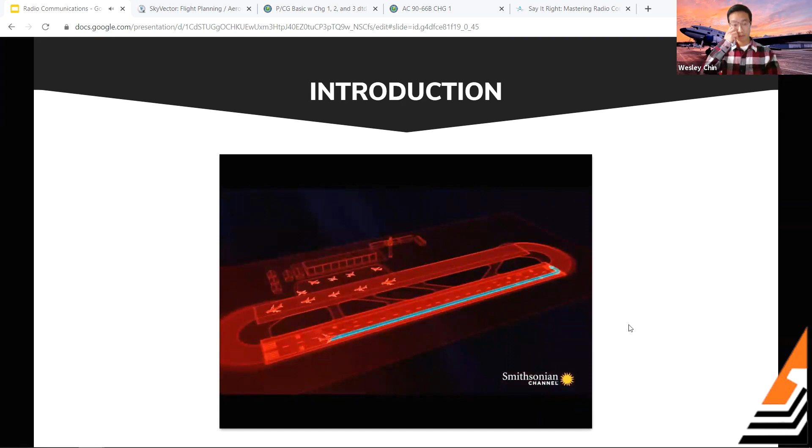Okay, cool. Los Rodeos Airport on the Spanish island of Tenerife is busier than it's ever been. BA 783, hold short of the runway and stand by for taxi clearance. With so many planes parked in the taxiways, the controllers instruct departing flights to taxi along the airport's only runway to get into position for takeoff. One of the planes waiting to get to Las Palmas is Pan Am Flight 1736. The Pan Am crew is ready to get back in the air, but they can't taxi to the runway. A KLM 747 has stopped in front of them to refuel. Tenerife, KLM 4805, you finished refueling, requesting clearance for startup. He said, follow KLM down the runway, backtrack, make an exit to get around back of KLM. So that's what we were doing. First Officer Bragg is unfamiliar with the airport. He checks a runway diagram to help find their turn. Okay, that's this one right here. Close ahead. It's going to put us on the taxiway. As they taxi, they listen to the tower controller tell the KLM crew ahead of them what to do after departure. You are clear to the Papa beacon. Climb to and maintain flight level 90. Right turn after takeoff. Roger, clear to the Papa beacon. Flight level 90, right turn up. We are now at takeoff. Okay, stand by for takeoff. I will call you. And we're still taxiing down the runway, Clipper 1736. Papa Alpha 1736, report runway clear. Okay, we'll report when we're clear.

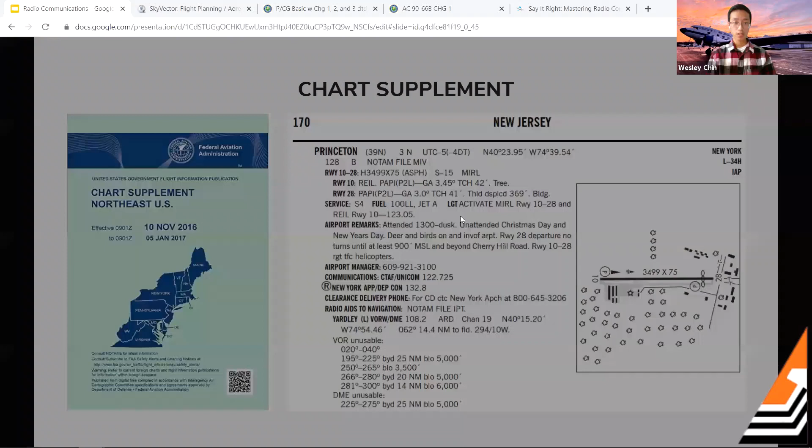If we take a look at the chart supplement for a tower airport such as Trenton, let's decode this. Again we see some of the same things: the airport manager number. They now give us weather data sources, there's your ASOS frequency, with a phone number to call that will play back the ASOS. Communications: there's your CTAF frequency, ATIS, and Unicom's on 122.95. Philly approach or departure control is on 123.8.

And here are all your frequencies again. Tower is on 120.7. Ground is on 121.9, and clearance delivery is on that same frequency. Something to mention here: this is for Trenton, and for those who don't know yet, Trenton is class Delta, which means the tower is part-time. Whenever the tower is closed, the tower frequency 120.7 becomes the CTAF frequency instead.

If we look at the tower frequency, they also give additional information besides the frequency. Next to it we have 1100 to 0300 Zulu, and this symbol. This is the operating hours of the tower in UTC time. The symbol indicates this area observes daylight saving time, and then we would have to adjust, so it becomes 1000 to 0200 Zulu. Again, that's in UTC and not local time.

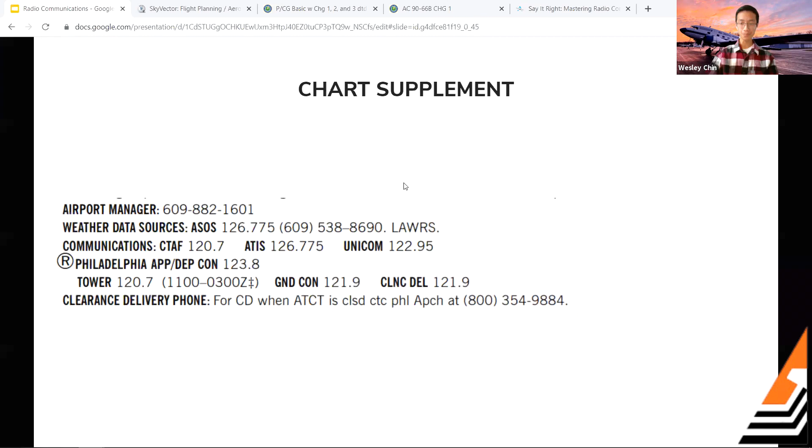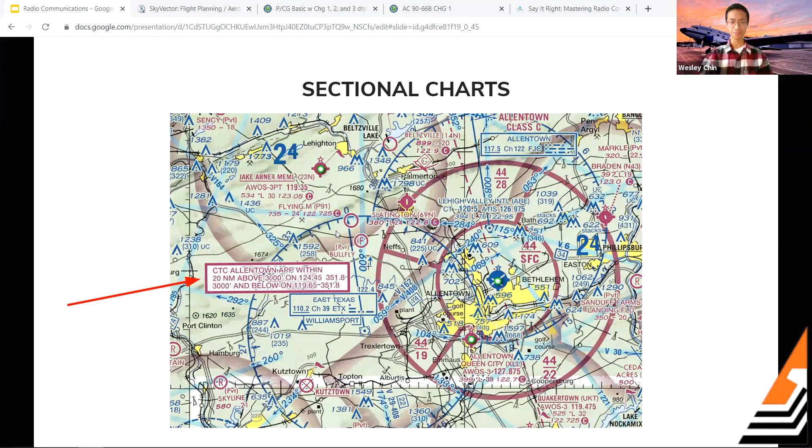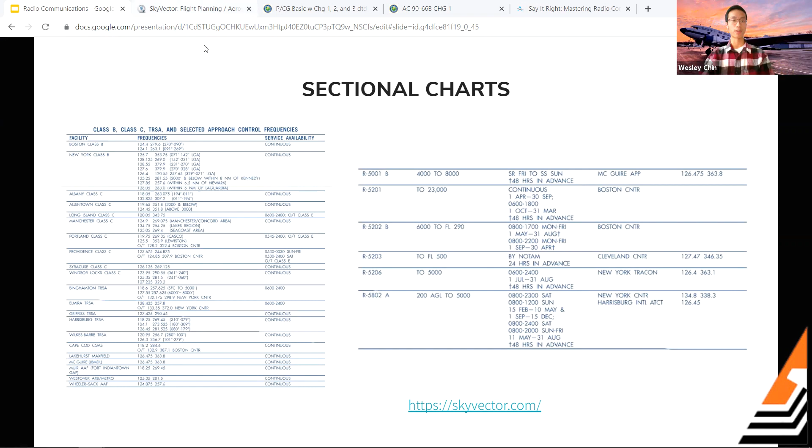And the last thing I wanted to bring up with the sectional charts that some of you may not be aware of just yet is the legend; the side of the sectional chart actually provides a lot of additional information. So what I'm going to do here is hop over to SkyVector. Here's our sectional chart for New York. We're not going to look at the chart itself, we're just going to check out this side with the legend.

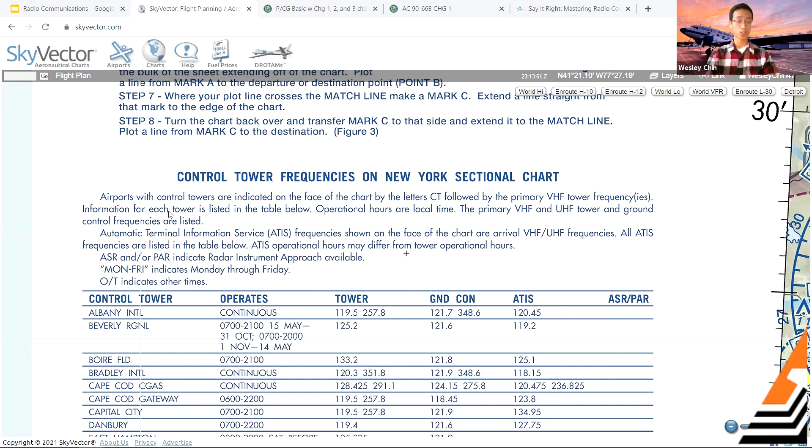Right over here is the legend, how to decode the sectional if you have a question about anything. If we come down right here, it says control tower frequencies on the New York sectional chart. Airports with control towers are indicated on the face of the chart by the letters CT, followed by the primary VHF tower frequency. And it says information for each tower is listed in the table below. So basically, for every towered airport, you have all your information with your frequency.

So let's see, for example, Capital City Airport right here. It operates from 0700 to 2100, and this is going to be in local time. Tower is on 119.5, ground is on 121.9, and the ATIS frequency is 134.95. So this is a pretty good resource to check out as well.

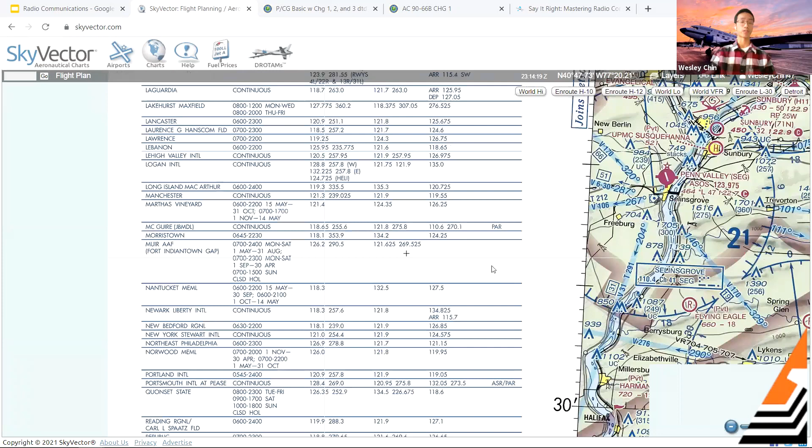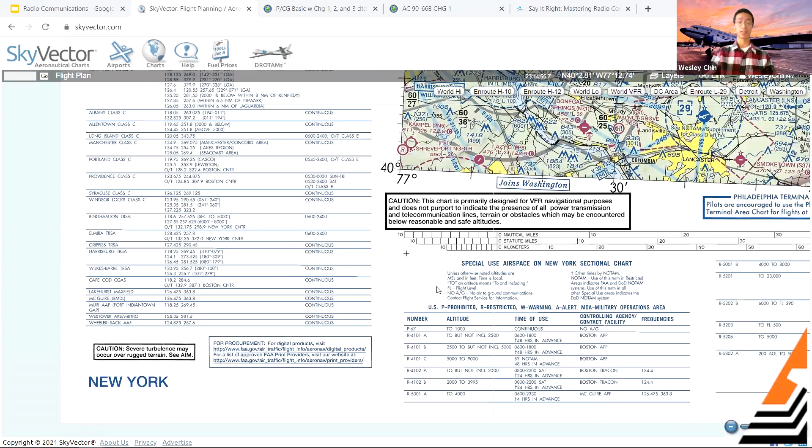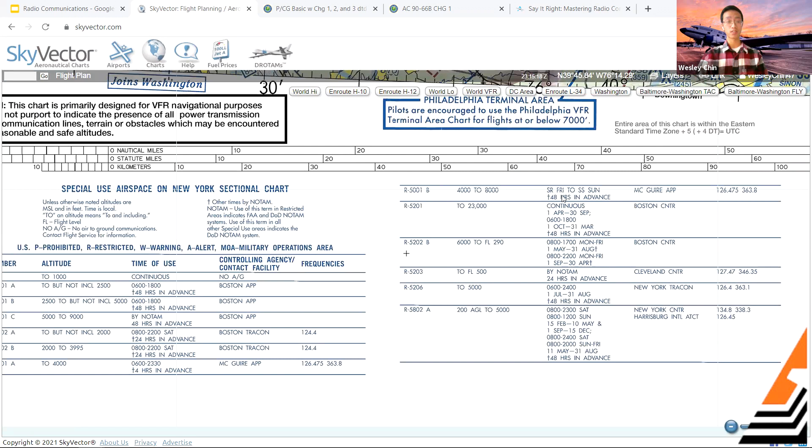And the last thing I wanted to mention with frequencies on the sectional is right on the bottom here, anything to do with special use airspace. It says special use airspace on the New York sectional chart, and it breaks it down into all your different types of special use airspace. For example, right here, restricted area 5001B. Altitude is from 4,000 to 8,000. Time of use, sunrise Friday to sunset Sunday. And the little symbol here says other times by NOTAM, and they'll provide that 48 hours in advance.

If you ever have to contact someone about it, you would contact McGuire Approach, and their frequency right here is listed: 126.475. So there's a lot of places on the sectional chart that you can get frequency information.

So I just showed you some of them, but if you kind of dig around, you're going to find lots of different places. So let's take, for example, right here. It says caution, heavy jets operating at 2,000 and 3,000 within 15 nautical miles of McGuire, which is on 126.47. So maybe that's something you would want to monitor around over there.

Cool, so we'll get back to the slides here, but the last thing I wanted to mention with the pre-flight planning at least is, once you're in contact with controllers, they're going to be providing you with the frequency to reach the next controller, right? So you may have written something down on your nav log or notes, whatever, during your pre-flight planning.

But once you're in contact with the controller, they're going to be the one that's providing you with the next frequency. And something we're going to really emphasize is you should be reading back frequencies when instructed to change, right? And I'll talk about that a little bit more afterwards. So yeah, that kind of wraps up the pre-flight planning section.

And what we're going to do now, we're going to move on to talking about radio technique, procedures, and phraseology, mainly at towered airports. So when we discuss radio technique, probably the most important thing to really get is understanding is the most important part of radio communications. So really making sure we're not just repeating back what the controller says without having a clue of what they actually want. We want to make sure both sides know what exactly is going on there.

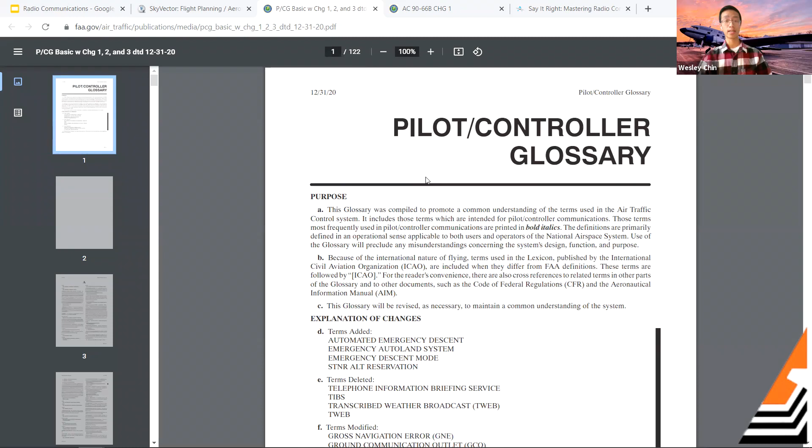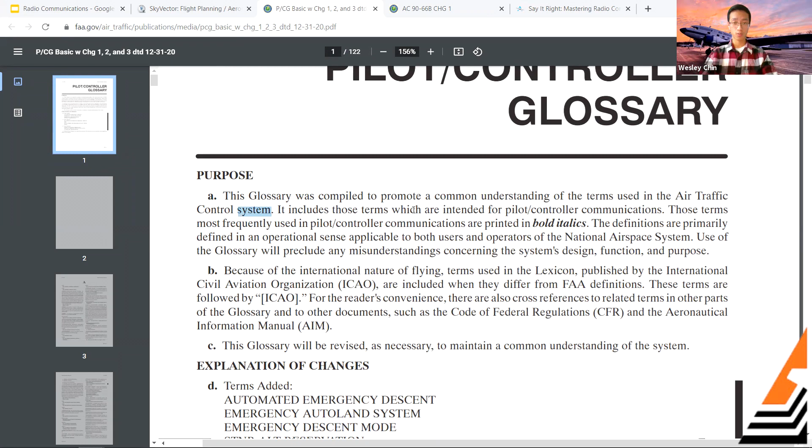This section also mentions this pilot controller glossary that the FAA published, and I'm just going to show this right here as well. So, all right, cool. So here's the pilot controller glossary, right? If we zoom in, it says the purpose is this glossary was compiled to promote a common understanding of the terms used in the air traffic control system. It includes those terms which are intended for pilot controller communications.

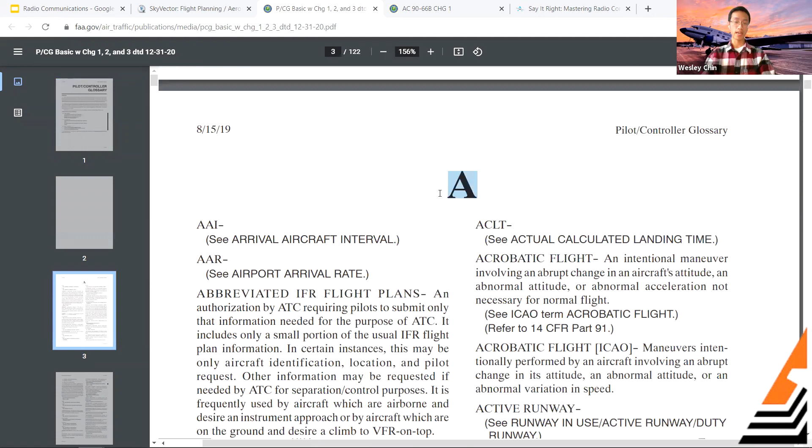So this is kind of like a dictionary to whatever you need to know about phraseology and communications. If there's a word you're unsure about, it's probably in here. So if we scroll down, you're going to see it's formatted in alphabetical order. So here's A. And for example, the word abeam, right?

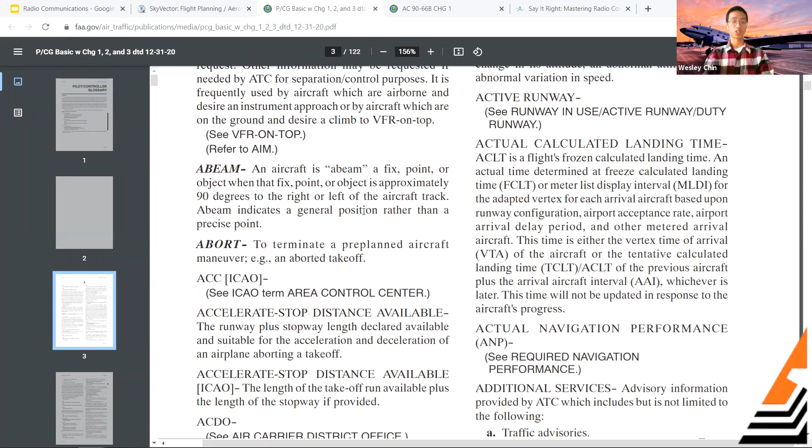If you don't know what this means here, it says an aircraft is abeam a fix, point, or object when that fix, point, or object is approximately 90 degrees to the right or left of the aircraft track. Abeam indicates a general position rather than a precise point. So this is going to be a pretty good resource for everyone to check out if there's any terms or phrases that you're unfamiliar with that an air traffic controller may say.

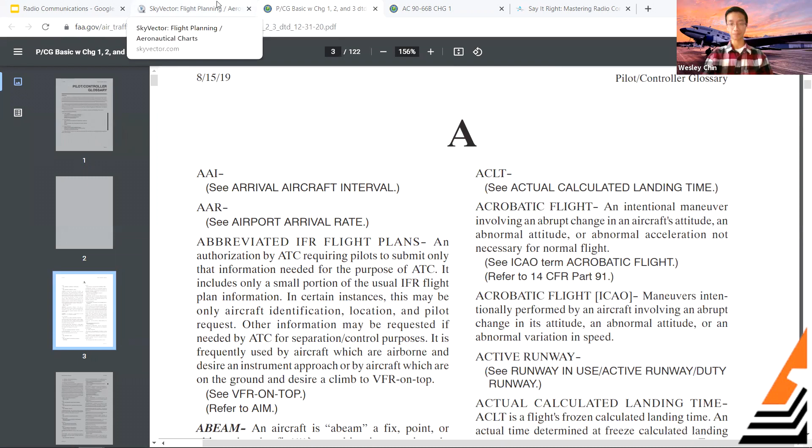So the last thing to mention here: talking on the radio can be intimidating, even to experienced pilots. So it's totally okay to feel like that. But the most important thing is practice makes perfect, right? There are ways to really practice effective radio communication, all this different phraseology, which we'll go over.

So some additional things to talk about with technique, and some of these I already mentioned. One, listen before you transmit. Before you press that push to talk, make sure no one else is talking on the frequency. You don't want to end up stepping on someone and blocking their call, and then more frequency congestion there. For example, let's say you're tuning into a tower frequency. Wait a few seconds before you transmit. Just listen to see if it's busy or not, and if there's not too much going on, then transmit.

The next thing I said earlier: think before transmitting. Really know what you're going to say before you say it. And if it's a really lengthy call that you're about to make, it's okay to write it down if you need to, especially in the beginning stages of learning radio technique. When you receive an instruction or clearance from ATC, it's a good idea to also write that down just to avoid any confusion.

So for example, even if it's something as simple as a heading or an altitude, I'll just quickly jot that down to make sure I know it. It's very easy to repeat it back because short-term memory works like that. But in a couple of seconds, it's probably gonna be gone. You may totally forget it.

The next thing may seem kind of silly. After pressing the push to talk button, a slight pause may be necessary to be sure the first word is transmitted. So make sure you actually have that button down, wait a second or so, and then transmit, because sometimes you may cut off that first word, and we may just hear "traffic, 8 Mike Charlie taking off 28," and that's it. We don't know what airport that is. So just wait a second beforehand.

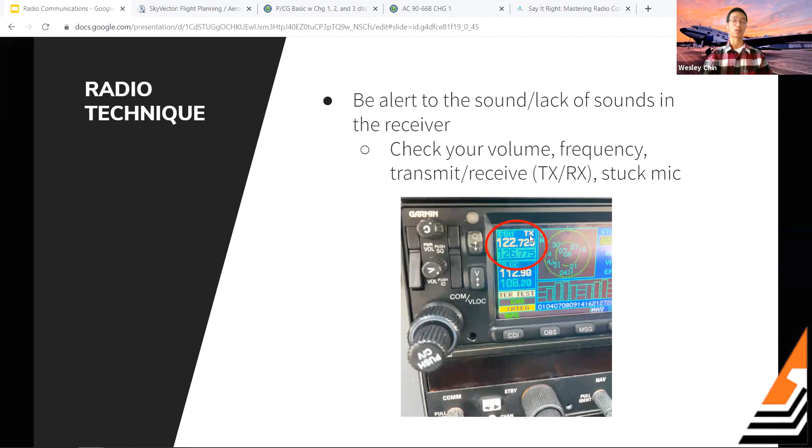We also want to be within the operating range of your equipment and ground station equipment. It sounds complicated, but we're just reinforcing the line of sight concept. For everyone trying to tune into Trenton ATIS on the ground at Princeton, that's why. Just wait until you take off and gain some altitude first, because higher altitudes increase the range of those communications and you'll be able to receive those frequencies.

So that's kind of the basics of radio technique. And what we're going to go over now is this kind of formula to developing your radio calls, right? This is not my thing, just found it somewhere, but it's called the 4 W's of radio communication. So we're going to kind of break it down like this here.

So the first W, whom you're calling. So this could be Trenton Tower, New York Approach, Philly Approach, wherever it is. The second is going to be who you are. Skyhawk 29 Mike Charlie, Diamond 412 Papa Juliet, whatever it is. Third is where you are. This could be 4 miles west of Princeton, or you'd say 2 miles south of Solberg VOR at 3,000. You give your altitude as well, right?

And finally, the last W, what you want. So this could be requesting flight following to Reading or inbound for 3 full stop taxi backs, whatever it is. So this is the general formula we want to follow for radio communications: whom you're calling, who you are, where you are, and what you want.

So what we're going to try to do now is practice this for just 2 examples here. So the first situation: you, November 493 Romeo Mike, are 5 miles east of Princeton at 5,500, looking for flight following from New York Approach to Brookhaven. I'm not sure if anybody can unmute themselves, but does anybody want to try this radio call here?

Yeah, I can unmute you guys. If there's a raise your hand function, if you guys want to. Oh, cool. All right. Yeah, let's try that. Over by the reactions.

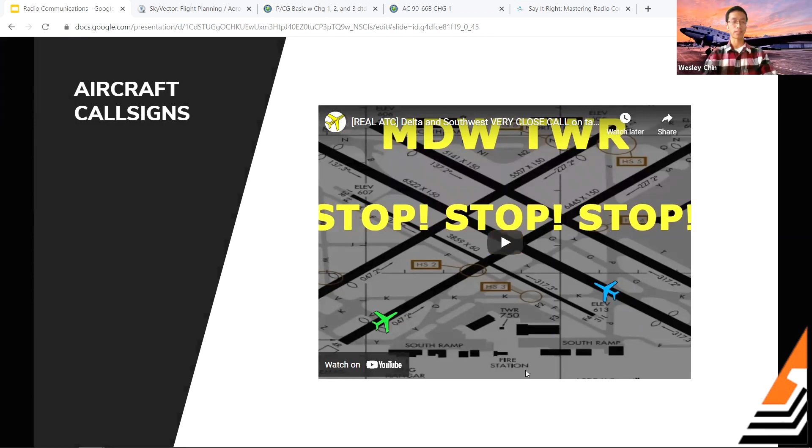So what I'm going to do here is share my screen again, share the sound. Let's see if this plays. Okay, so I'll let you guys kind of read it.

So it says a Southwest and a Delta aircraft basically have similar call signs: Southwest 3828 and Delta 1328. And this was at Chicago Midway, and it said they had a close call when both aircraft started to roll at once. And this is mainly because of similar call signs.

So I'm just going to let this play here. You guys can kind of watch what's going on. Hopefully the audio is working here. There's nothing playing just yet.

Delta 1328, be advised, similar call sign on frequency is Southwest 3828, cross runway 31 center and runway 31 left. Taxi via Yankee to 4 right. Clear to cross 31 center and 31 left, Yankee to 4 right, Delta 1328, will be aware. Southwest 3828, be advised, similar call sign on frequency is Delta 1328. And once you approach 31 right, as you're crossing it, you can switch over to tower. Have a good day. All right, we'll be listening up for that, and we'll switch over to tower approaching 31 right, Southwest 3828.

So I'm just going to stop it quickly. So just from that, the ground controller already warned them. They said, okay, look, there's someone else with a similar call sign. So just like that, something should be turning on. They say, okay, we're going to pay extra attention now just to make sure we're not incorrectly reading back the clearance. But all right, let's continue.

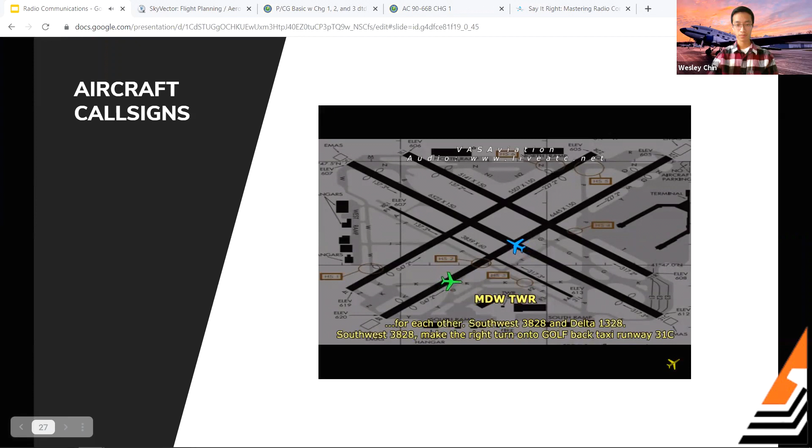Wait, stopping. Make the right turn onto taxiway Delta. Right turn to Delta, hold short runway 4 right. Delta, hold short 4 right, Southwest 3828. Keep answering for each other. It's Southwest 3828 and Delta 1328. Southwest 3828, make the right turn onto Golf, back taxi runway 31 center. Right turn on Golf, back taxi 31 center, we're in.

All right, so I'll stop the video right there. So kind of the main thing to get from this is that similar call signs idea, right? So just making sure you're really listening carefully to not incorrectly execute the wrong clearance. So what happened was both those guys read back the Southwest takeoff clearance at the same time, and they both started rolling on crossing runways there.

But something else that I think it's important to mention that the video didn't talk about, I'm not sure if this is just because of the live ATC audio from where they got it from, but from what I was hearing, every time the controller was giving an instruction, I couldn't hear that first word. It was just kind of the flight number, 1328 or 3828, maybe half of the word Delta or Southwest was cut off or something like that.

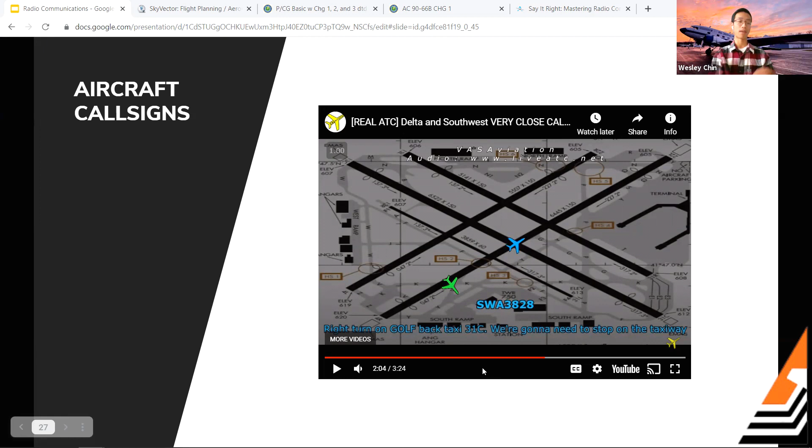So again, that's emphasizing the importance of making sure you just pause for a second before you actually transmit. So press the button, pause for just a second, and then talk, right? So you're making sure that nothing is cut off there. So that's kind of wrapping it up on the radio technique and aircraft call signs. And what we'll discuss now is the phraseology portion. So we talked about the formula, the 4W. So now how do we actually use this aviation lingo, I guess you could say?

So the first thing to discuss is the phonetic alphabet. We use the phonetic alphabet when identifying aircraft during contact with ATC facilities. So when I'm calling Trenton Tower, I'm not saying Trenton Tower N493RM, I'm saying Skyhawk 493 Romeo Mike, using the phonetic alphabet there. And we can also use the phonetic alphabet for single letters, or any time we have to spell out a group of letters or difficult words when it's hard to hear, for example. But if we just have to say Roger, we don't have to say Romeo, Oscar, Golf, Echo, Romeo. Just say Roger. That's all good.

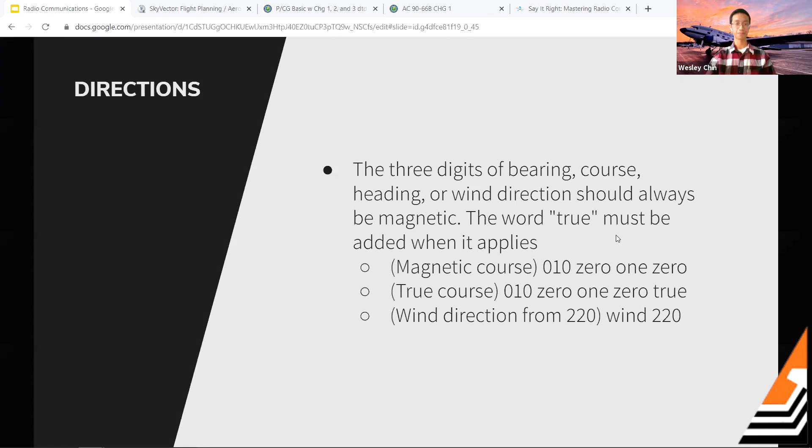So finally, the last thing to talk about in phraseology is time, right? We should know that the FAA uses Coordinated Universal Time, UTC time, for all operations. We also call that Zulu. If we ever have to use local time, we use the word local or the time zone equivalent over radio communications. So for example here, 0930 UTC would be 0930, or if you want to express it in local, it could be 0130 Pacific or local. And again, we're converting that.

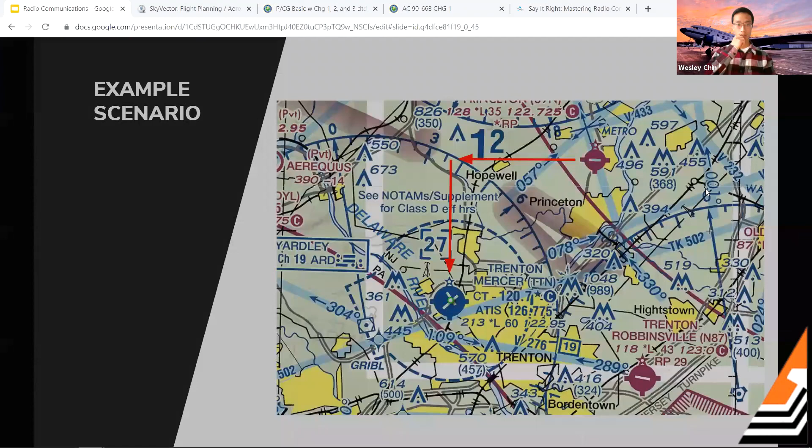So if we remember, all this starts with pre-flight planning, right? On the ground, we should already have an idea of the frequencies we want to be communicating on. So you should be checking that chart supplement and sectional chart to determine any frequencies and have them written down on a kneeboard, iPad, or, as I'll show you, on the taxiway diagram. So here's our sectional, and for Trenton, we can decode some of this information. CT, control tower, is on 120.7. The star here indicates that this is a part-time tower, and this is also the common traffic advisory frequency, denoted by the C there. ATIS is on 126.775, and the only other frequency I see here is 122.95, and that's going to be your Unicom frequency.

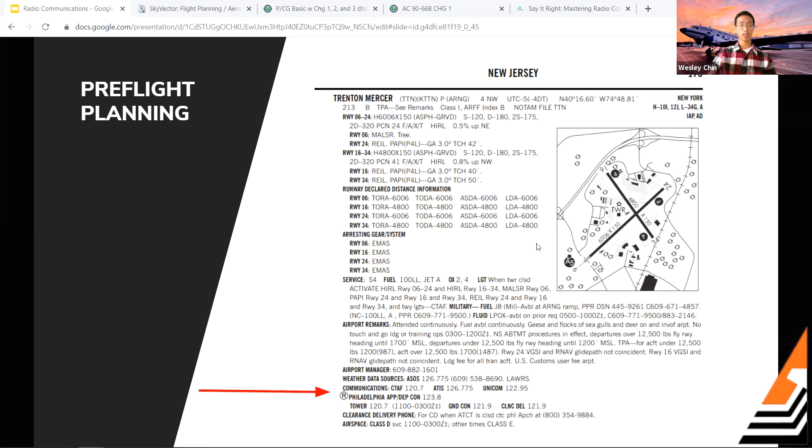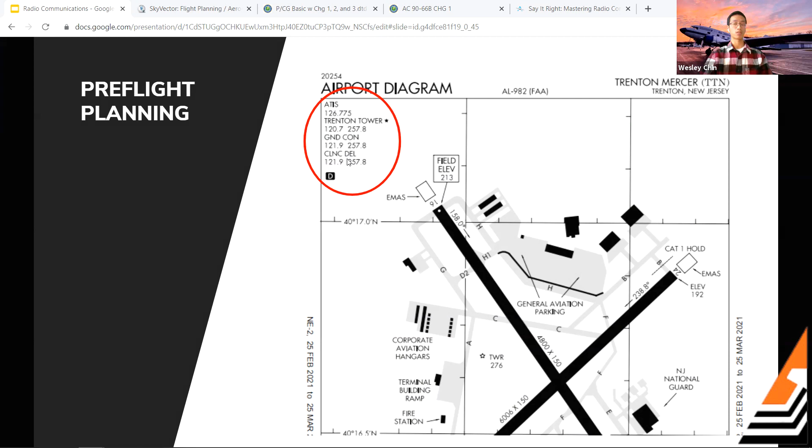Now, if I check my chart supplement, this is the same thing I was showing you earlier, right? So here's Trenton Mercer, and here's your communications section. There's your CTAF, ATIS, Unicom. They have Philly approach and departure on 123.8. There's your tower frequency and ground and clearance delivery frequencies that you may need as well. So I just have this written down somewhere. Something else you should always bring with you or have accessible is your airport diagram with your taxiways and runways. And if we take a look at the top left here, they also have your frequencies listed. There's your ATIS, your tower with the star, which indicates part-time, and ground control and clearance delivery sharing the same frequency.

So that's kind of what I would focus on for the frequencies, at least. There's much more to pre-flight planning, as we know, right? 91.103. But in terms of frequencies, just again, want to be aware of who I'd be contacting there. I didn't worry about any approach or flight following frequencies, right? This is a nice short flight, and Trenton's class Delta, right? They don't have an associated approach controller there.

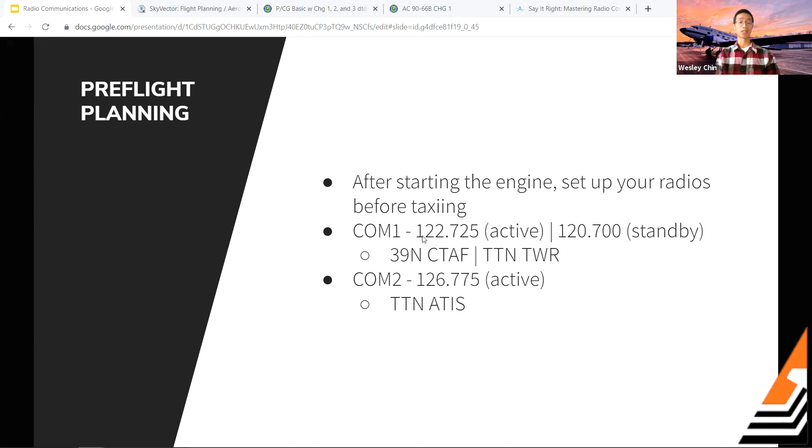So what I would do now, after getting in the airplane, starting that engine, I want to make sure I set up my radios before I actually start taxiing, right? So this assumes that we're in one of the flying school planes, 2 radios, right? So in COM 1, in the active, I would have Princeton CTAF, 122.725. And in the standby, I would put the Trenton tower frequency, 120.7. Now my COM 2, I would actually put the Trenton ATIS, 126.77. So I can tune to that later.

So I know we've kind of been focusing on towered airport communications, but here are just some example calls you could make when you're departing Princeton and then climbing through, clearing the pattern and all that. But again, the FAA doesn't have any published standardized phraseology for this, so we'll just kind of go over this. So departing Princeton, you could say: Princeton traffic, Skyhawk 8 Mike Charlie, departing runway 28, straight out departure to the west of Princeton. So that could work there.

And now let's say you're clearing the pattern, climbing through 1200, you could say: Princeton traffic, Skyhawk 8 Mike Charlie, 2 miles west of the field, climbing through 1200, departing to the west of Princeton. So if anyone was at the previous Zoom meeting, there's only 2 ways the FAA has to depart the pattern, straight out or 45-degree turn in the direction of the pattern, right?

So let's say, all right, I'm clear of the pattern. I'm at 3000. I'm just west of Princeton right now. So the first thing I would do is use COM2 and switch to Trenton ATIS and listen for any information, right? Jot down if it's information Alpha, information Bravo, whatever it is, and write down any information I may need. So when they're giving me the altimeter, for example, they say altimeter 3014. I'm not actually spelling out the word altimeter, I could just be writing A3014. Or when they're giving me the wind, I'm not going to spell out WIND. I'm just going to abbreviate it in more like a METAR or TAF format, just to make my life easier, make it a little quicker, right?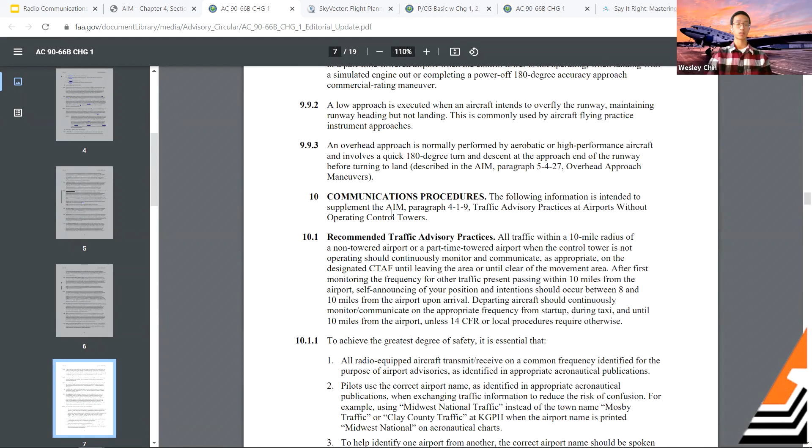So they give you recommended practices here, information provided by Unicom, how to self-announce your position or intentions, like, if you have questions about how to make that call when you're 10 miles out or over the field and all that stuff. They say, don't use the phrase any traffic in the area, please advise. They talk about confusing language, like we mentioned earlier, right? Avoid using the words to and for. They also even give insight on something like practice instrument approaches in VMC conditions. You know, guys sometimes doing straight-in approaches, right?

So this is going to be a pretty good resource too. And it's also good for traffic pattern stuff, right? If you want to review your traffic pattern entries, departures, kind of all the different legs, right? So really, really good document for non-towered operations.

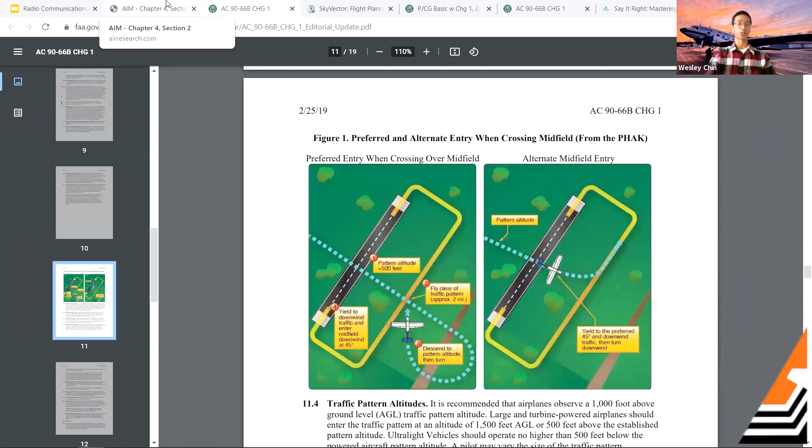So this is going to be a pretty good online course to go over as well, just to get you up to date with radio communications, learning about this stuff. And again, you will get WINGS credit for doing this course. So this is pretty solid as well. But other than that, that pretty much wraps up the presentation. So hopefully you guys were able to refresh yourselves and learn some stuff.